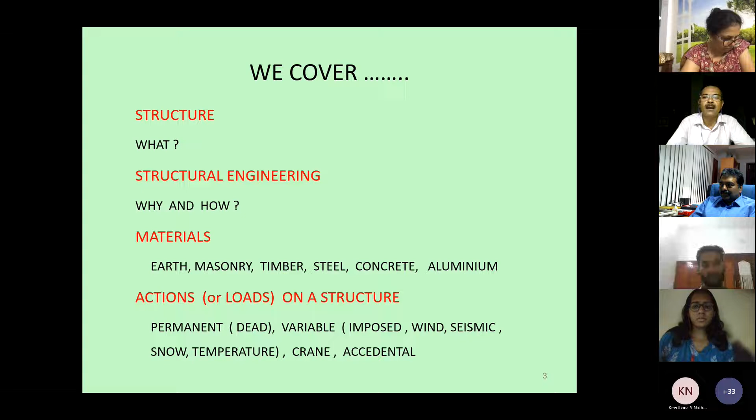During this course, we will try to cover what a structure is and what structural engineering is, why and how. We should know the load path on a structure, so that we can understand the behavior of the structure and design it. We will cover the basic materials used in general construction, like earth, masonry, timber, steel, and concrete. Concrete itself can be either RCC or pre-stressed concrete, plus aluminum, glass, and similar materials.

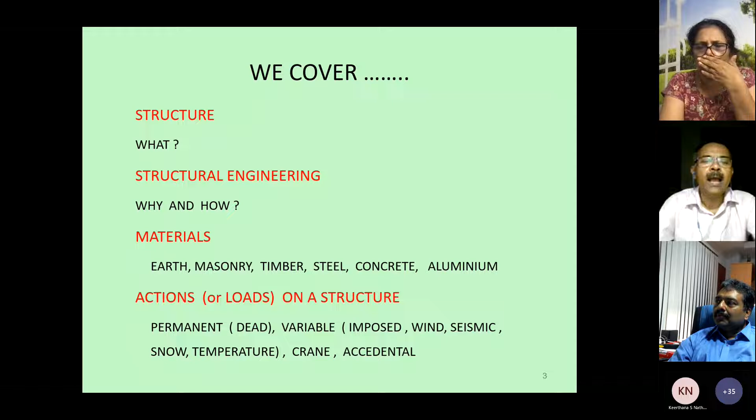Then we will also understand the loads on a structure. The loads are nowadays termed as actions. The IS code or any international code will term a load as an action.

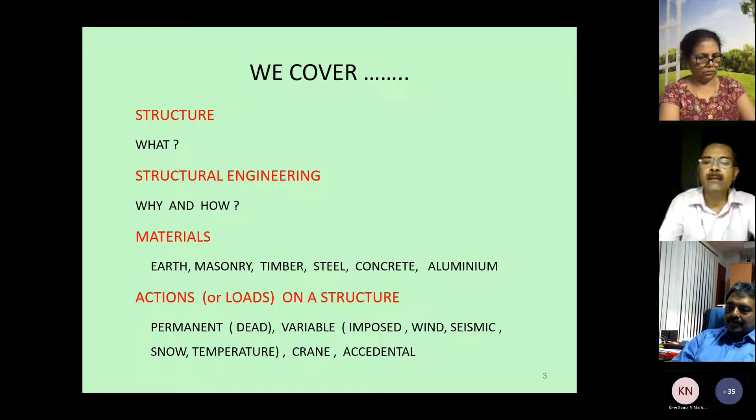So the actions can be a permanent action, a dead load, a variable action, that is an imposed load or a wind load or a seismic load. It can be a crane loading on a structure. It can be an accidental loading which is not expected at the time of design, or it can be moving loads like vehicles on a bridge. It can be a static load or a dynamic load, and the variations are so large that it is to be dealt with by the civil engineer.

We will cover the seismic design, the design and detailing against the seismic load, basic concept of seismic design. Seismic loading is a totally different conceptual loading as far as civil engineering is concerned, totally different from other types of loads in a structure.

So we'll try to cover the different stages in the design of structures, starting from the concept design, modeling, analysis, design, detailing, as-built drawings. Unfortunately, our syllabuses do not cover the initial and last part of this. The syllabuses cover modeling, analysis and design well in detail, but they lack in the concept design, wherein the student should be able to place a structural system inside a building or a bridge, or a structural load path into a structure.

And the syllabuses also do not give the knowledge on detailing and as-built drawings, that is beyond the design. That is, you have the area of steel or a cross section designed from theory, either in steel, concrete, or pre-stress, but to put it on a drawing in such a way that the members can be jointed properly, so that a buildable structure is formed, or in reinforced concrete, how to place the Ast calculated at top, bottom, or as a stirrup, whichever shape, that is called the detailing.

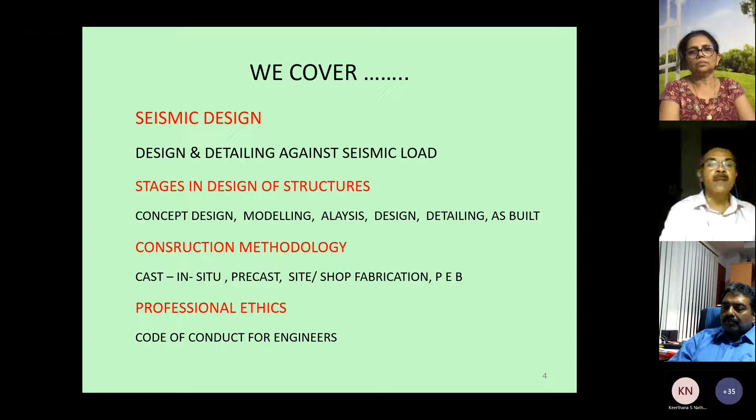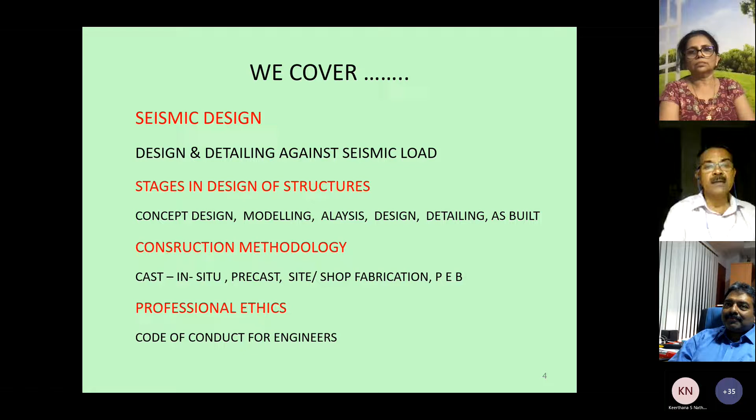Now, construction methodology, we will try to cover the different methodologies used in construction, like cast in situ construction, precast construction, site fabrication, shop fabrication, pre-engineered buildings, like that. Also, towards the end of the series, we will try to cover the professional ethics that is supposed to be observed by a civil engineer, the code of conduct for engineers, as we call it.

Okay, we'll start with a definition of a structure. A structure is nothing but a device for channeling the loads that result from the use of the structure or from the mere presence of the structure into the supporting ground. As we know, just by building a structure, even though it is not put into use, we are creating certain loads by the construction itself. That is the self weight of the structure, or it is blocking the wind and as such a wind load is generated,

or we are building a mass when we construct, and an earthquake can create an inertia load on the structure, like an acceleration from the earthquake. When it moves through the soil, it will interact with the structure and create an inertial force within the structure, mass into acceleration, just like Newton's law, F is equal to ma.

So if I want to carry a loading at some requirement, architecturally we can plan it, but beyond that, the civil engineer should build the load path or the systems into the structure, so that the load will stay there at the point of use without failure, without collapse, and without any issues with deflections and vibrations and things like that. So devising such a structure is the role of the structural designer.

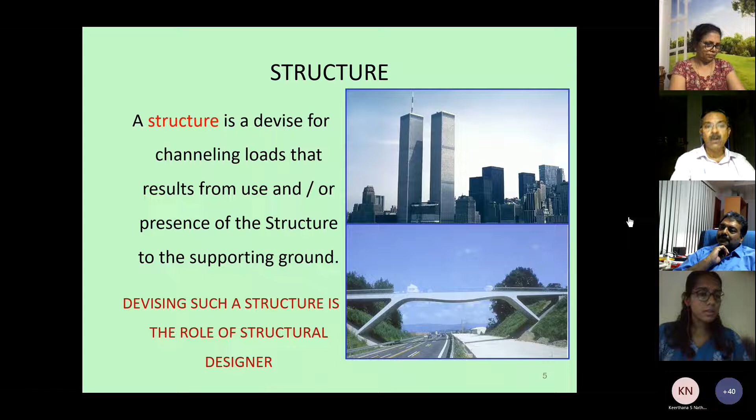If it is a building, it may be 60 to 100 years. If it is a bridge or similar structure, it may be 100 to 200 years. So during this period, a lot of loading can happen in the structure. All these things are to be considered at the time of design.

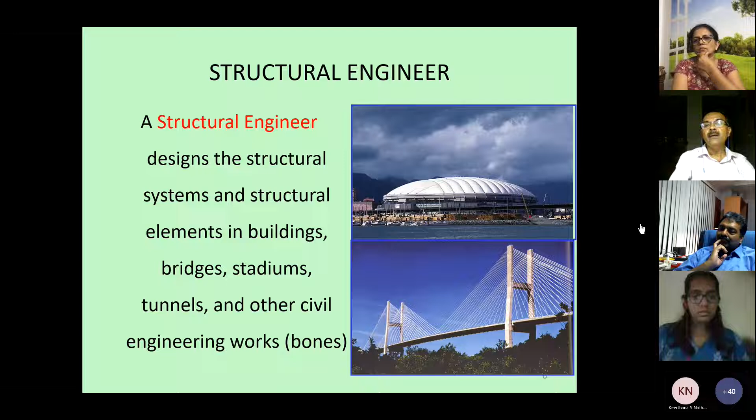So a structural engineer designs the structural systems and structural elements in the buildings, bridges, stadiums, tunnels, or other civil engineering works. They work as the bones of the structure. You can see several types of structures. This is a tensile membrane structure. You can see the roof; it's a stadium, which is totally a tensile membrane. This is another tension predominant structure, the cable stayed bridge, where the cables are in full tension and the spanning bridge is in bending.

So the structural design process is determination of the location, material, and size of structural elements to resist the forces acting in a structure. So that process is called design. The design is not just like mathematics or a statically determinate thing, where you get an answer directly. When you add 2 and 2, you get 4. But design is always an iterative process. So it involves certain unknowns, certain parameters.

For example, if you design a building, initially you have data of requirement. Maybe you require a structure of length of 10 meter, width of 20 meter, like that, or number of floors, 3 floors. But at the start, you don't know the total loading acting on that. So one load, like the self weight of the structure, will be decided only after you design the members, put the column sizes, beam sizes, slab thicknesses, like that.

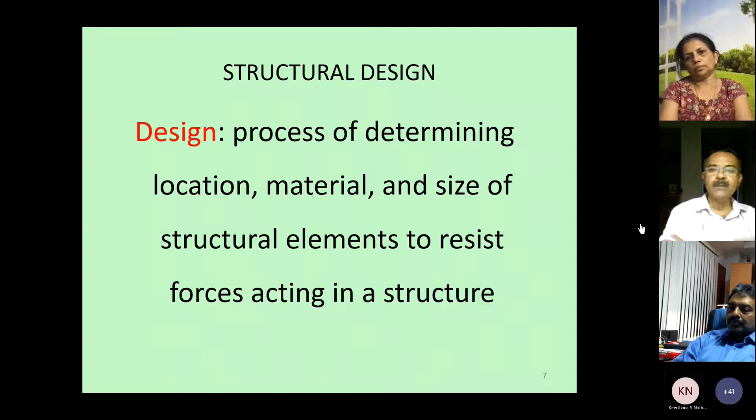So initially we assume certain values based on our previous experience and put some structural systems, and during the course of design, the iterative process will slowly improve the original design, and finally we come out with something that is constructible. We will see in due course the way in which we arrive at this iterative process.

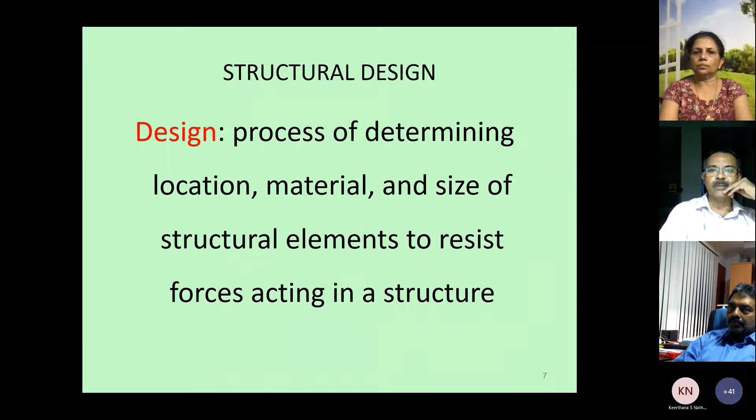The structural design deals with safety. Safety is the factor of safety we provide to a structure such that when the structure is loaded to the expected levels, it performs with all safe requirements. It also deals with serviceability. Just because the structure has got enough strength, it does not mean that the structure can be used. For example, if you are walking on a slab and you get a lot of vibrations, or you see some cracks on the slab, you may not feel it is safe to walk on.

So the general public should feel a structure is safe and serviceable. So beyond the safety, the structure should give a feeling of safety. That is the serviceability. So it should not deflect excessively, it should not vibrate excessively, it should not have large cracks, so that the user does not feel there is a certain element of unsafety in that. So that is called serviceability.

And then buildability. Just because we design any structure, it does not mean that we can build it in any shape. So buildability should be integrated into all the structures, so that we should be able to complete the project with available materials. Maybe some angles, some channels, some I-beams you design with may not be available in the market. So these are the things counted in buildability. You are constructing something in a workshop and trying to bring it to the site. Maybe the roads or the access is not adequate for those material sizes to get to the site. So these are all involved in buildability.

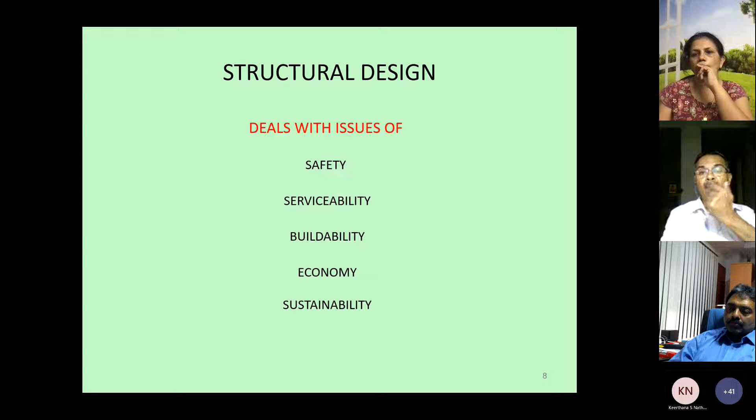A structure has got an initial cost as well as a lifetime cost. We may spend X amount of money at the start, but if we build a structure that is too expensive to maintain, during the life of the structure, 60 or 100 years, we may be spending much more on that as the lifetime cost.

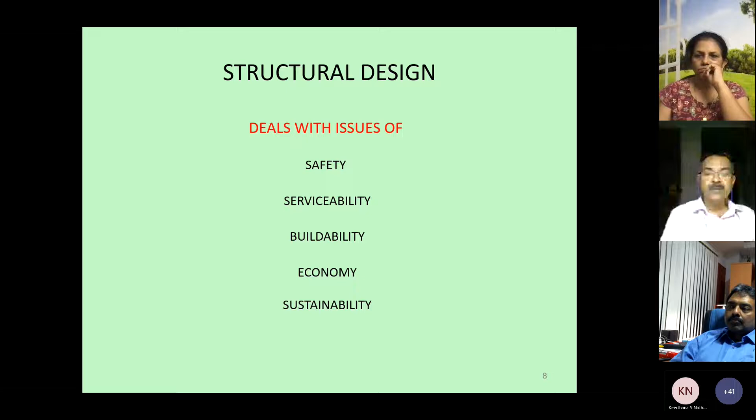So to keep the total cost controlled, the economy has to look into both the initial cost as well as the long-term cost of the construction, the lifetime cost of the construction.

Sustainability is the most important thing now. You all know that the carbon footprint is getting very high priority. Everybody is talking about that, climate change. Civil engineering is one of the areas capable of controlling the carbon footprint or environmental damage to a minimum, because concrete is the material which, by volume, is second to water in use by mankind.

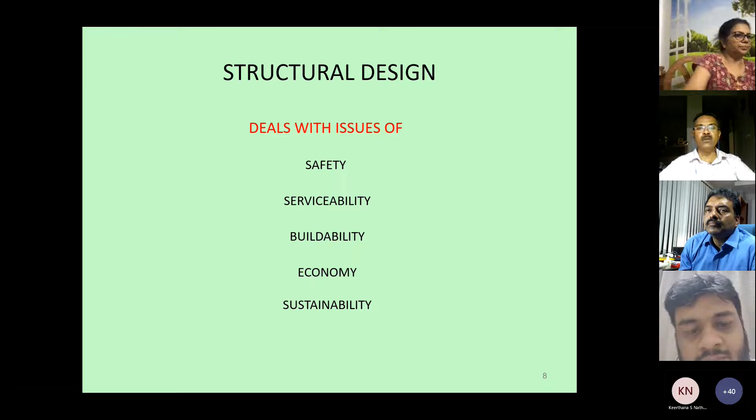The most used material by mankind is water. The second one is concrete. So if we make some saving on the concrete, it is a huge saving for the globe, for the earth. So we try to save on energy-intensive materials like cement and steel, and even environmentally damaging things like aggregates and sand.

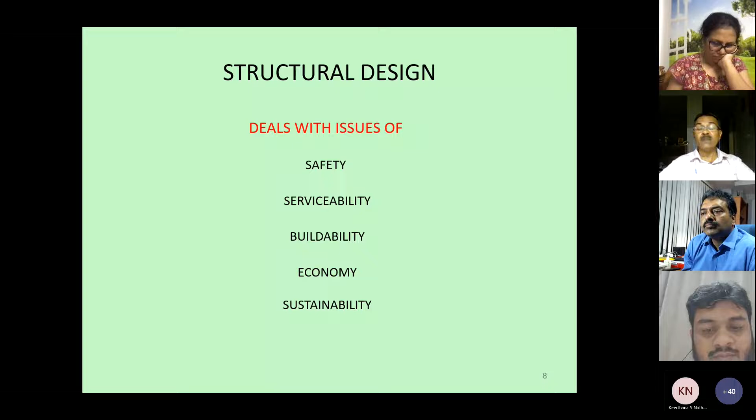Nowadays it is said that a sustainable structure is the minimum mass structure. As the mass of the structure goes up, the amount of material spent to make the structure stand by itself is more. So sustainability is a very important parameter that is looked into nowadays.

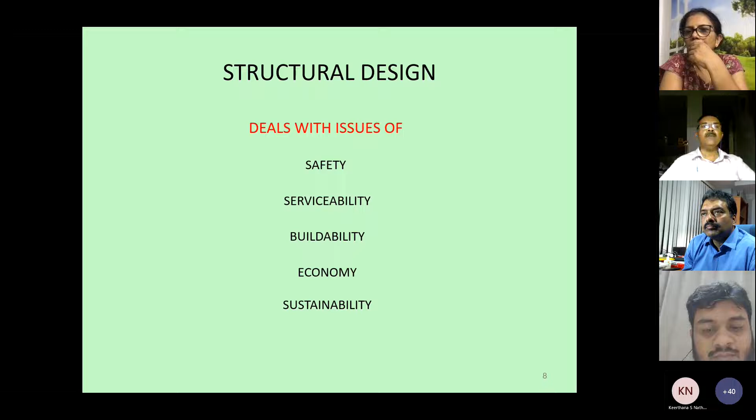Now, as we discussed, the design has several stages. Concept design is the start of the design. When you get a building plan, a residence, an apartment, a commercial building, or a bridge, we start with the concept drawing. We should think of the load on the structure and the load path through which the load can travel to the bearing stratum. Normally, all structures bear on the soil below.

For some structures with excess loading, we may transfer the load down to the rocky strata, much below the earth. So the concept design deals with different possibilities of transferring the load to the foundation within the functional parameters, and all these things are identified and studied in the concept design stage.

For the economical and sustainable concept, we make multiple models in the concept design stage for the same structure, of which the most economical and most sustainable one is chosen for further study before going into the detailed design. This part is not covered well in our syllabuses.

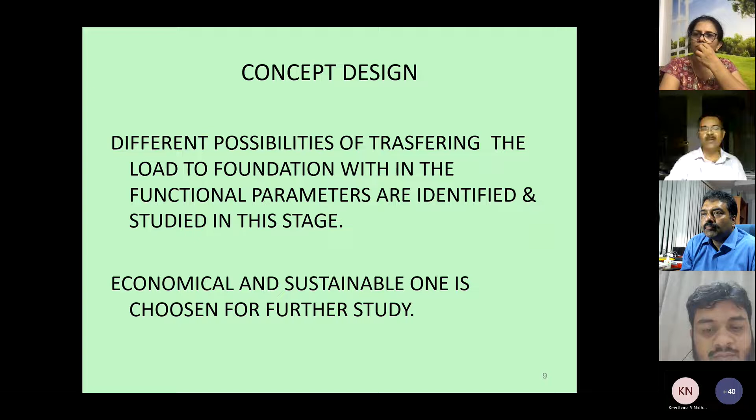Probably at a later stage, we will try to cover some dedicated classes on the areas where our syllabuses are silent, but where the job field our students are looking into expects certain knowledge. I'll give you a simple example of a concept design.

In order to support a point load, we have several options. We can put a beam on top of two posts, or we can make a frame, like a column-beam frame. Here you can have two masonry or concrete posts, then put a beam on top, either a stone, concrete, or steel beam, and put a load on top of that. So the beam is simply supported on top of the columns.

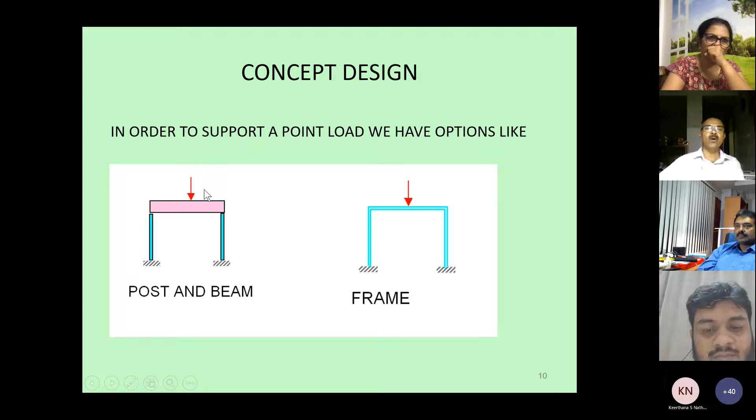For a second case, you can make a full frame, of steel, concrete, timber, or any material, and put the same load on it. You can see the material used here is much more than this. Conceptually it is shown with thicknesses, but even when we calculate it, we will see that a frame more efficiently carries the same load that may come on the post and beam.

Now, the same load at that height we can also support by using a cable. Cables, arches, etc. are membrane-loaded structures, in the sense that there is no bending in them. When you put a load here, it induces direct membrane tension in the cable, and as such they are more efficient at carrying the load compared to a beam or a frame.

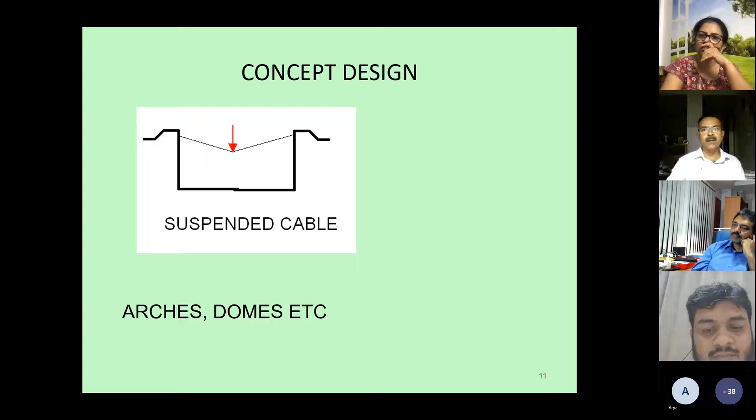So, a suspended cable. In the concept design stage, we identify the different systems that can carry the required loading expected on the structure, and then choose the most economical and most sustainable one for the final discussions, designs, detailing, and construction. Also, for the different materials that can come into this process, you can use earth, you can use masonry.

You can use timber, steel, concrete, aluminum, plastic. See, the list is endless. All these things are to be dealt by the civil engineer. Of course, we give thrust in the college as well as outside to probably steel and concrete.

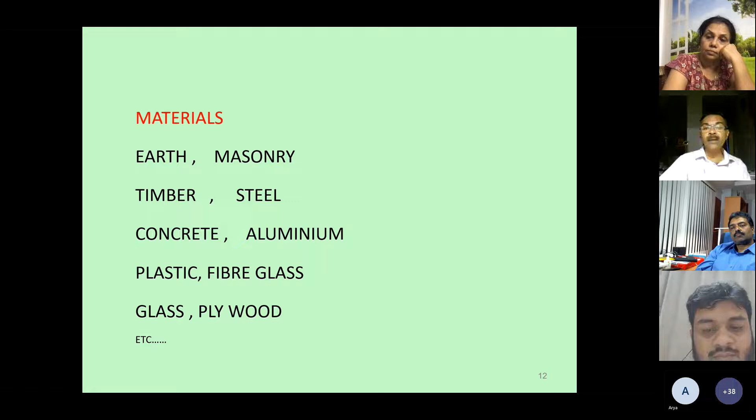But beyond that, we have so many materials that can be used and are being used in structural engineering, so we are expected to have a certain amount of knowledge on all the materials, how they behave, and the different behaviors like linear materials, non-linear materials, elastic materials, non-elastic materials, and elastoplastic materials. We will see how they behave later down the lane.

Now, earth as a material: there is so much construction done. Volume-wise, earth is one of the biggest volumes used. You can see there are earthen dams. If you think of Kerala, there is a dam in Munnar called Anayirankal Dam, one of the first earthen dams in Kerala, from the British period.

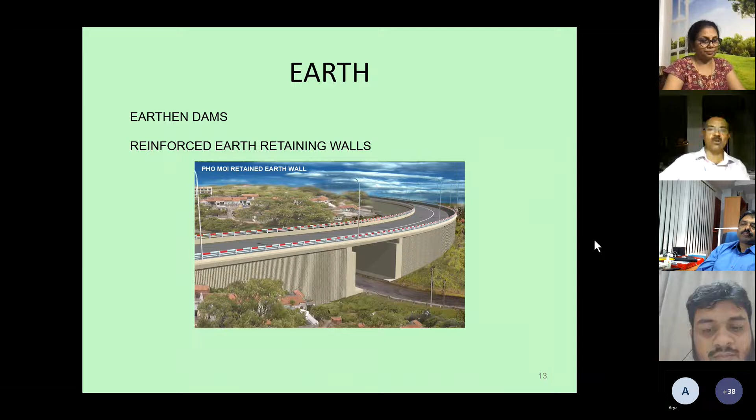And then in everyday life you might be seeing approaches to a bridge. The approach to the bridge is the two side roads that take you to the bridge. That is made up of reinforced earth. The earth is inside, and it is reinforced, just like our reinforced concrete. This is a reinforced earth approach road. So earth is used in several ways for construction.

You can see a closer view of the reinforced earth wall. Inside is the earth fill that is used for the approach road, and this is the fascia wall.

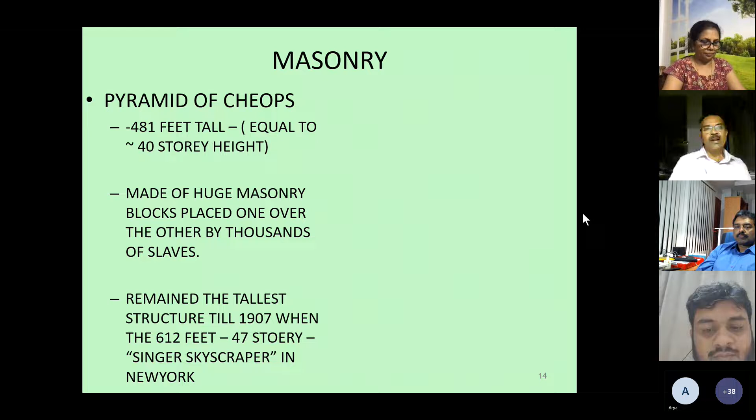Masonry is also an important material that has been used by us from very olden times. If you look at the pyramid of Cheops, that is around 481 feet tall. That is as good as a 40-story building nowadays, which was built BC, and it is made of huge masonry blocks placed one over the other by thousands of slaves working. They didn't have any machinery at that point of time. They had to work with their own available technology and available method of transportation.

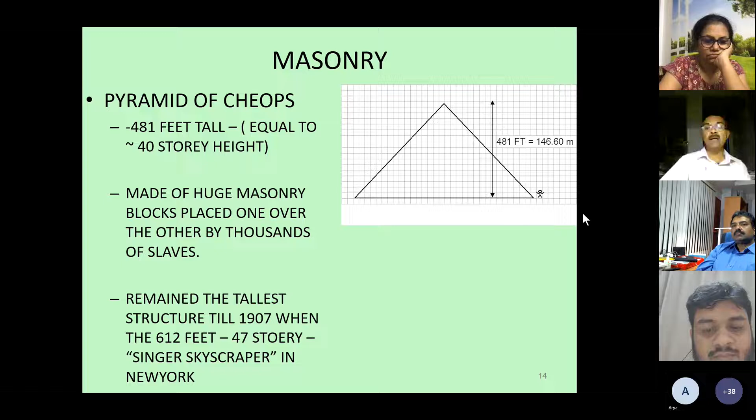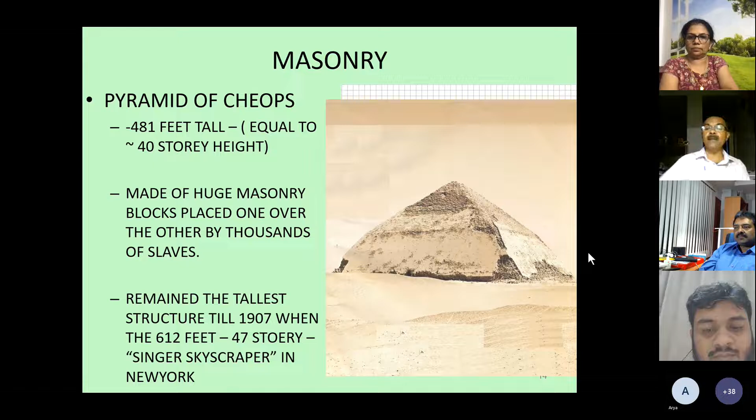And it remained the tallest structure till 1907, when the 612-foot, 47-story Singer skyscraper was built in New York, America. So it stood for thousands of years as the tallest structure. There is an image of the typical pyramid structure. You can see it is made of stone blocks placed one over the other, but with a very stable shape, the most ideal shape against earthquakes and cyclones.

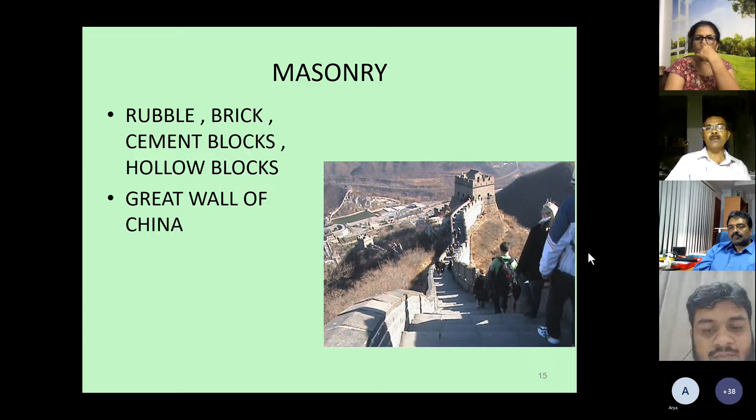Now masonry is also categorized into different types like rubble masonry using rock pieces, brick masonry, and cement blocks. Nowadays we put cement and aggregate together in block form to substitute the building units for masonry. There can be hollow blocks. If you look at the Great Wall of China, shown here, it is fully made of masonry, probably the longest structure on earth made of masonry.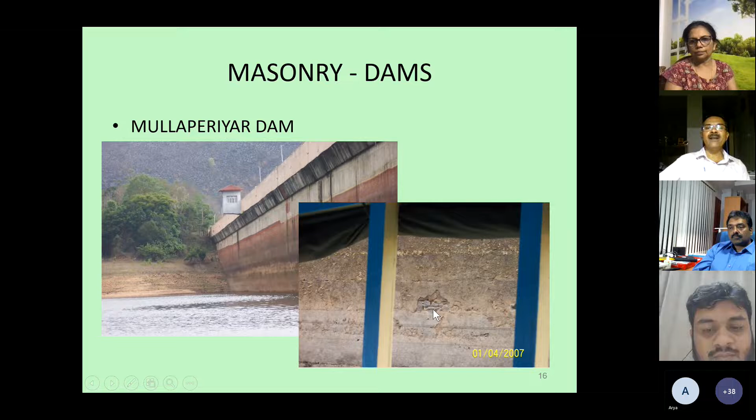As far as Kerala is concerned, the Mullaperiyar Dam, as you see in this image, is also a purely masonry structure. You can see a close-up view here showing the masonry where the plaster is not there. So it is a pure masonry structure.

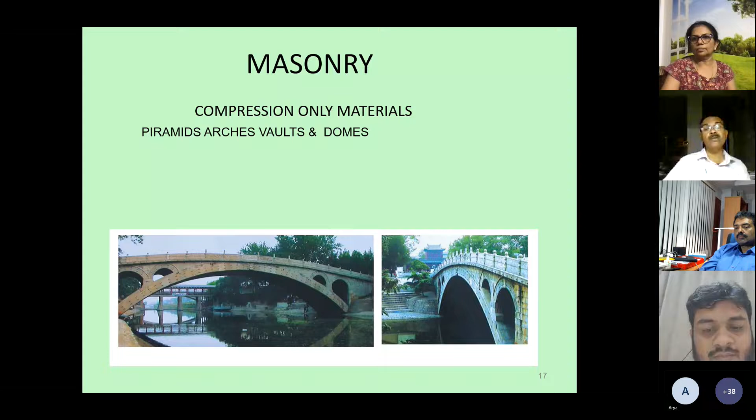Now, beyond that, masonry is a very powerful material as a compression carrying element. There were compression-only structural systems at some point of time when masonry was used extensively for construction. Roman arches are an example. Here you can see some Chinese bridges which were built in AD 600, and they are all pure arch compression-only structures. The advantage is that they do not require any tension carrying member, only pure compression elements.

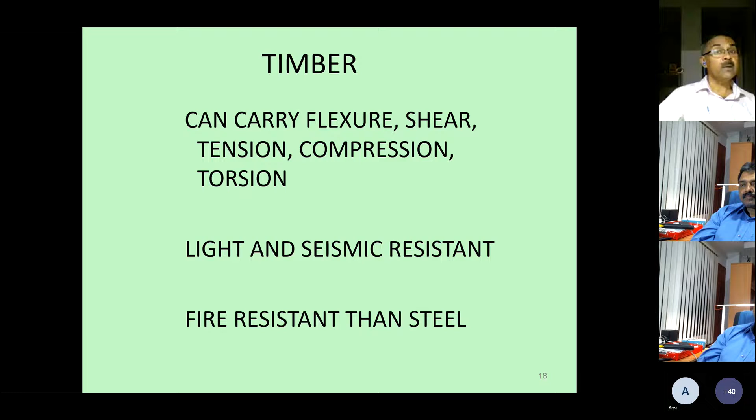Now coming to timber, it can carry flexure, shear, tension, compression, or torsion. Masonry can carry only compression, but timber is a much more versatile material. You can substitute it for the flexural element. You can substitute it for the shear element. You can use it in areas where tension, compression, or torsion is there.

Now it is very light. It is seismic resistant. Whatever light material is available can be used as a seismic resisting element, because seismic load is nothing other than mass into acceleration coming on the structure, the mass generated from the structure by construction, and the acceleration coming from the earthquake. So lesser the mass, lesser the seismic load.

The timber is also fire resistant compared to steel. Steel, as you know, when it heats up, loses its strength. Timber, of course, catches fire, but at the peripherally placed areas, the surface of the timber, when it gets into fire, it turns to carbon or coke, and this prevents further heat transfer into the core of the structure, thus becoming a very fire resistant element along the periphery. It is more fire resistant than steel.

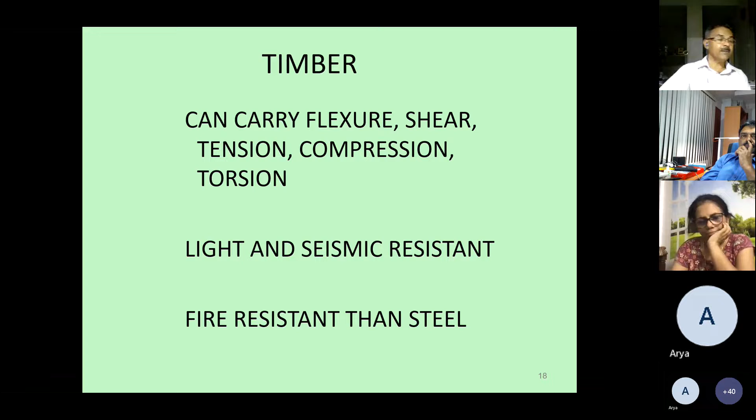Now coming to steel. Steel as a material is very extensively used, and it is also a reusable material. Unlike concrete, if you put steel into a structure, you can utilize it even after the life of the structure, because if you put 100 tons of steel in a structure, you get all the 100 tons at the end of its life, which means the remaining cost at the end of life can be as good as its original construction cost, or better sometimes.

Of course, the initial cost of steel is slightly more than that of a concrete building, and as I told you, there is initial cost and lifetime cost, all put together as total cost. So the advantage of steel is that you can easily join them by welding or bolting. Welded joints are possible.

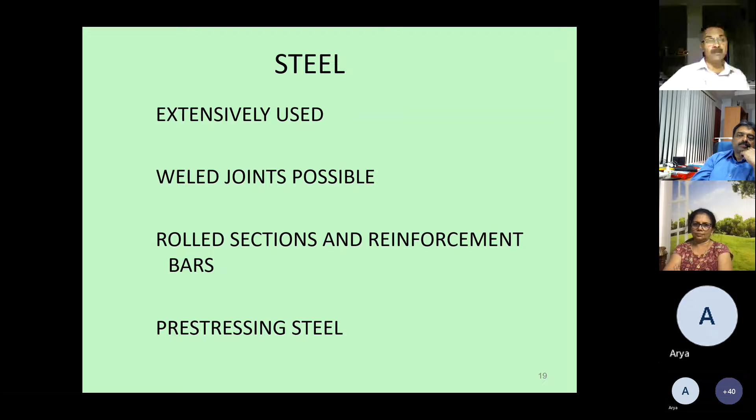Steel as a material comes to us for construction either as rolled sections or as reinforcement bars. Steel also comes as a very high strength material, the wire ropes for pre-stressed concrete construction. So the pre-stressing steel, or so-called strands, is very high strength steel. Our normal mild steel has got around 250 Newton per mm square as yield stress, whereas our pre-stressing steel gives us 1800 Newton per mm square as yield capacity. So it is almost 6 to 7 times that of mild steel. The advantage is that with more strength capacity, you can use lesser material.

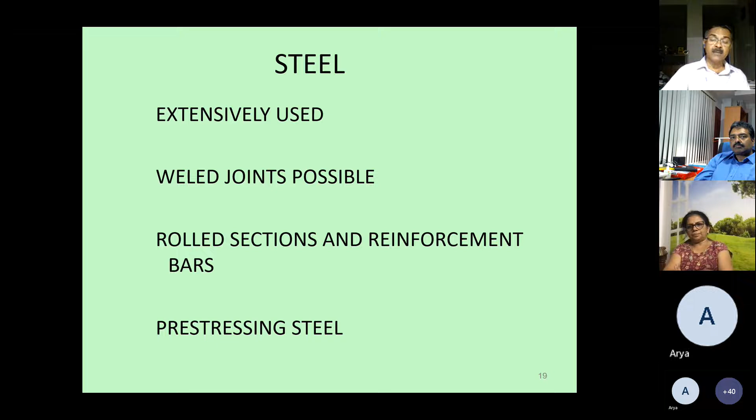Now, steel in tension is very efficient, but when used in compression, very short columns in compression fail by compression yield. If you compress the material from both sides, it tends to yield and fail. Whereas a very long column, with the same compression put on either side, tends to fail by buckling. You can imagine how it buckles, it bends. Buckling is a process in which the bending deflection happens perpendicular to the axis of the member.

So buckling is different from bending. Bending is a process in which the deformation is along the load. So if this member is bending, it has got a horizontal load here, and the bending happens along the load. Now here the load axis is this, and the deflection axis is perpendicular to that. So buckling is differentiated from bending by the direction of deflection. If the direction of deflection is along the load, it is called a bending problem. If the direction of deflection is perpendicular to the load, it is called a buckling problem.

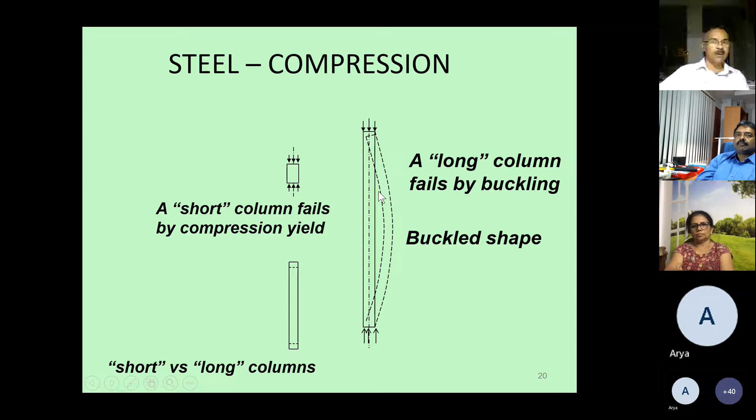Now assume we are heating up the same specimen. As you heat it up, you can see this yield level, which is around 250 Newton per mm square for mild steel. If we plot the yield at different temperatures, with temperature on the x-axis and yield stress on the y-axis, the steel yield at 250 Newton per mm square remains almost constant up to 400 degrees. Beyond 400 degrees, it sharply reduces. At 800 degrees or more, the yield stress is less than 20 or 25 Newton per mm square, at which point the structure is unable to carry even its own self weight.

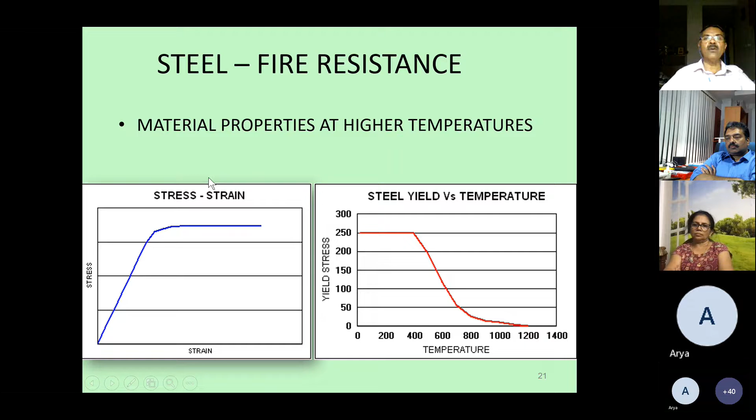This fire protection is one of the additional costs for using a steel structure. Now we can see the fire protection typically used.

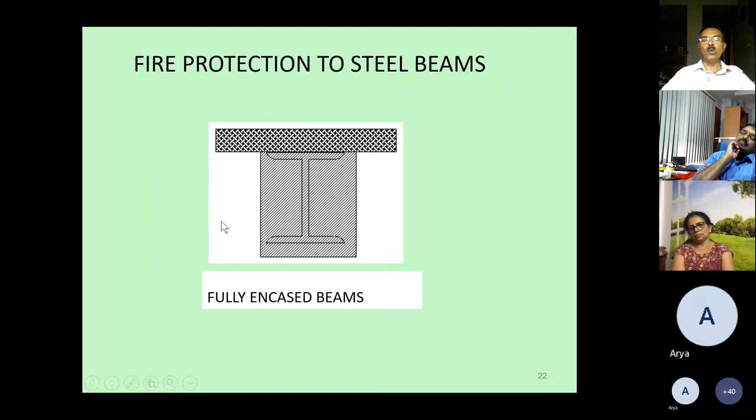It can be a concrete encasement for the beam. You can see a slab above, and a beam here. It is protected with concrete around it, so that when fire happens, the concrete will prevent heat reaching the steel beam, so that when the steel beam is less than 400 degrees Celsius, it can carry full load capacity. That is the principle of fire protection: we isolate the structure from the fire. If a fire happens, it will not be allowed to heat our structural element.

Now, this is another way of making a partially encased beam for fire protection. We make a masonry infill in the web of the structure, so that some area will get heated up, but the core of the beam will not get heated up when protected with masonry. It is much easier to do this sort of fire protection compared to the earlier one, so this is also widely used.

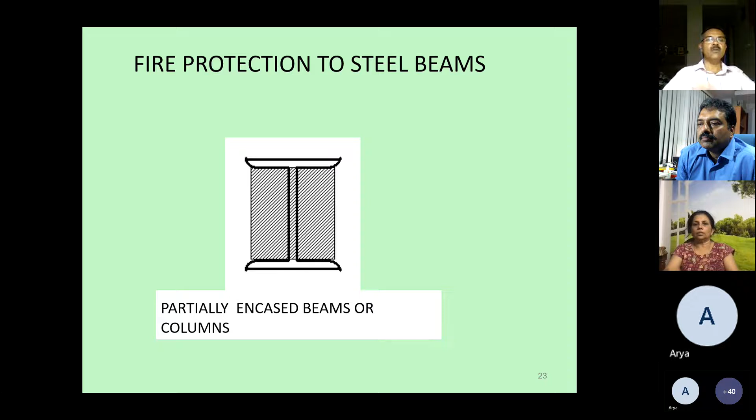Now, lateral stability is important for steel beams. Take a cantilever beam fixed on a wall, loaded at the tip with a vertical dead load. If the beam is laterally unstable, in the unloaded position it is straight, but when loaded, it not only deflects downwards, it also twists and deflects laterally. This happens because it has a y-axis moment of inertia much less than the x-axis moment of inertia. If the structure is confined at its wings, this sort of buckling will not happen. So lateral stability is important for steel beams, and such a problem does not occur if the beam is loaded along its weak axis.

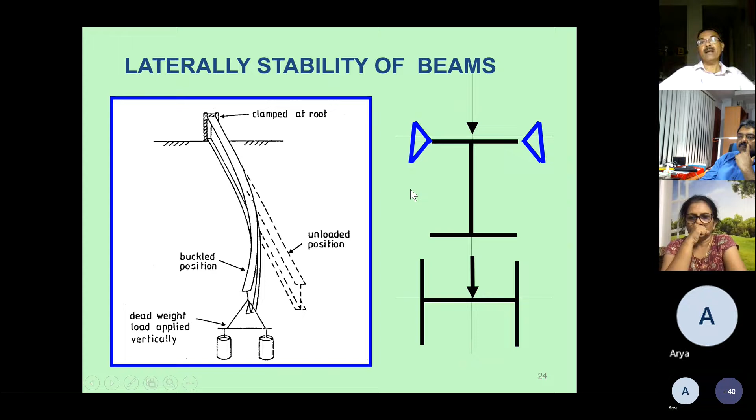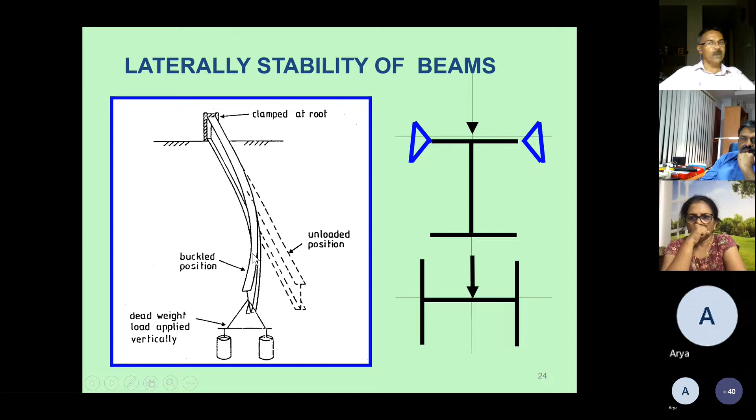This I-beam has two axes: the major axis and the minor axis. If we load on the major axis, this buckling will result, but if we load the structure on the minor axis, this sort of lateral buckling will not happen. So lateral stability of the beams is very important.

Another issue is local buckling. The beam can have buckling. As discussed previously with columns, buckling of the full element from one end to the other is called global buckling. But if only the compression flange of the beam is buckling, this is called local buckling. The beam should be capable of carrying the load without global buckling as well as local buckling—both should not happen.

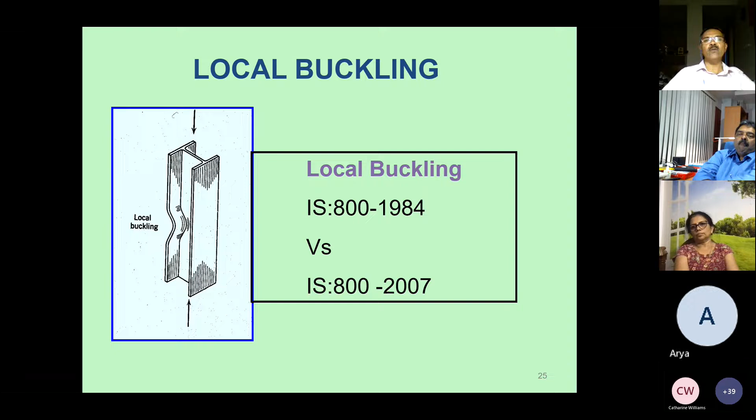This was not covered in the previous steel construction code, IS 800, the 1984 version. In 2007, when IS 800 was revised, it included provisions for dealing with local buckling. So now the current IS code has provisions for design, how to check for local buckling and how to prevent it.

Okay, now from steel we come to concrete. Rajiv, up to what time can we go? You are on mute, sir. I think 8:50, sir. 8:50, okay good—you are on mute. I was saying we can take up to about 5 minutes of questions, so 8:55. Okay, fine, 8:50 or 8:55, yes.

So concrete—beyond steel, concrete, as we discussed previously, is the most widely consumed material by mankind after water. Concrete is very important as far as the civil engineer is concerned, because it comes into the picture whichever field we work in, whether transportation, tunnels and bridges, buildings, or environmental tanks. Whether we work with water supply or sewage treatment, in all these areas, concrete is a major material.

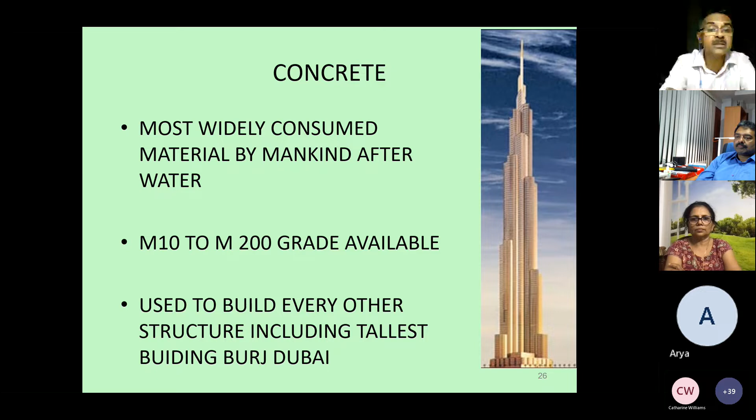The concrete can be either site mix or ready mix, meaning it is either factory made or site made. In the site mix, we get the basic materials to the site and then mix them in a mixing machine or manual mixing, depending on the volume required, and then use it at site.

Whereas in ready mix, the mixing happens in the factory, then it is carried to the site with some special chemicals added, like retarders, to prevent setting, through a truck transit mixer which is still rotating while transporting the concrete. When it reaches the site, we pump the concrete to the required location. That is called ready mix concrete.

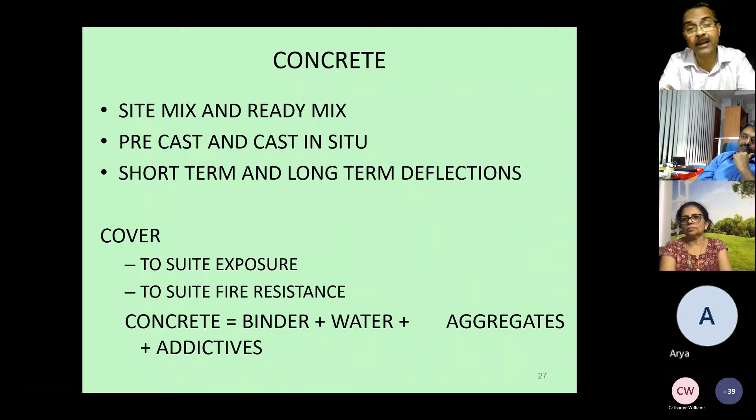The concrete can be either precast or cast in situ. Concrete structures sometimes as a whole are ready made at a factory and transported, like a column, a staircase, a beam, a slab. All the elements can be readily cast at a factory so that the quality can be controlled, they can be cured properly, and then transported to the site and fixed and jointed.

The concrete can be cast in situ also. That is the first one we discussed. The site mix and ready mix will give us the cast in situ concrete. We place the formwork and then cast the concrete at site. Whereas in the precast case, the forms are in the factory, concrete is made in the factory, then cured in the factory and then transported to the site.

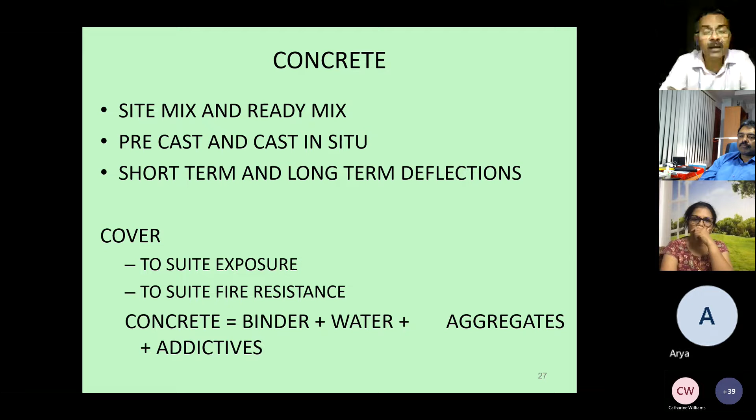Now, the primary problems with concrete are that it is very massive, very heavy, so it is not very seismic friendly, but of course it is used widely in seismic areas as well with adequate precautions. We will see that down the lane.

Concrete has got both short-term deflections as well as long-term deflections. This is a different thing that concrete exhibits compared to other normal materials used in construction.

That is called creep. Creep is a special property of concrete, wherein if the concrete is loaded to a certain level initially and it is left there without increase in the load, keeping the same loading on the structure, after a period of time, the deflections increase. This process is called creeping.

Creep is a property exhibited not only by concrete but by several other elements as well, but concrete is the most important material exhibiting creep as far as construction is concerned.

So the long-term deflections are different, to the tune of almost double the initial deflections. When we de-shutter a concrete structure, we get X deflection. After 5 years, if we go back and measure, it may be 2X. So this increase in deflection is a concern and has to be accounted for in the original design and construction.

We have several methodologies. We'll discuss some of them.

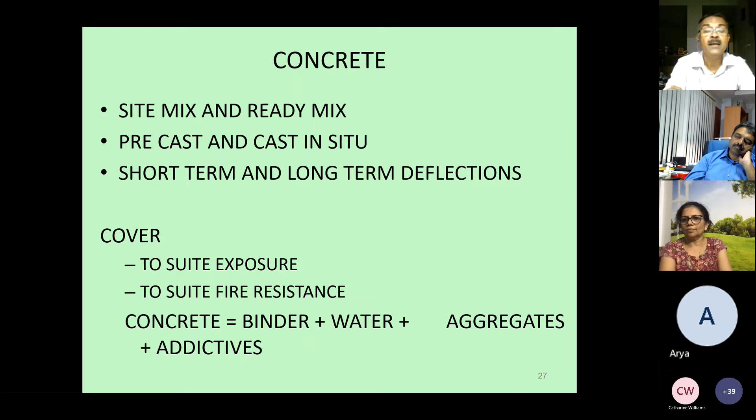The inhabitants of the structure can safely escape from the structure in the event of a fire, and it depends on the time by which the nearest fire force people can reach the building. So based on that, we say that the structure will have a fire resistance of 60 minutes, 120 minutes, like that. So depending on that, we adjust the cover so that it gets adequate fire resistance.

So basic concrete is made of a binder. It may be cement or a different material, geopolymer cement, and several other materials. Water plus aggregates plus additives. Aggregates are either rock aggregates, sand aggregates, natural aggregates, or man-made aggregates. Then additives are property modifiers for concrete. The property modifiers are quick setting, slow setting, strength, quick hardening.

It can be waterproof admixtures. It can be bonding agents. It can be non-shrink chemicals. So many things. Just like a medical shop, you get the modifiers and the medicines that are added in the concrete mix from a shop. 200, 300 categories by different manufacturers. So many additives are there. So that itself is a big study for a civil engineer nowadays, the concrete technology.